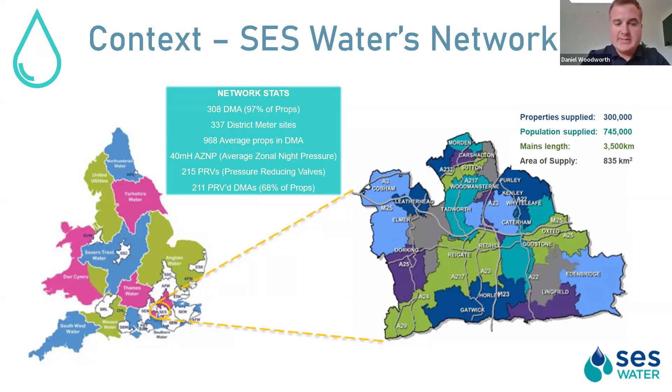So when we set out, as you do when you start any project, you think about what your principles are and what you're trying to achieve. And I had one very clear overarching objective, and that was to reduce leakage. So SES Water were funded in PR19 for a smart network as one of the levers that were being pulled to reduce leakage by 15%.

So that's all well and good. That's an overarching aim, but what did we break that down to? So there were a number of things. Firstly, we said we want to live this concept of a golden hour. So we want to be on top of things within the first hour. We want to know about them and we want to have actioned them. So when customers ask, what's going on? Why haven't I got any water? Why can I see water running down my street? We would know.

Secondly, we set out to create dynamic real-time alerts with high confidence levels. Had to be dynamic, had to be real-time. That was one of our key things that we said it needed to be. We wanted to involve our staff, and I've already mentioned this, but we wanted to put knowledge at their fingertips. There's nothing more frustrating being out on the ground if you don't have information, or even worse, if the customer has more information than you do. So that was one of the key things, to put knowledge at their fingertips.

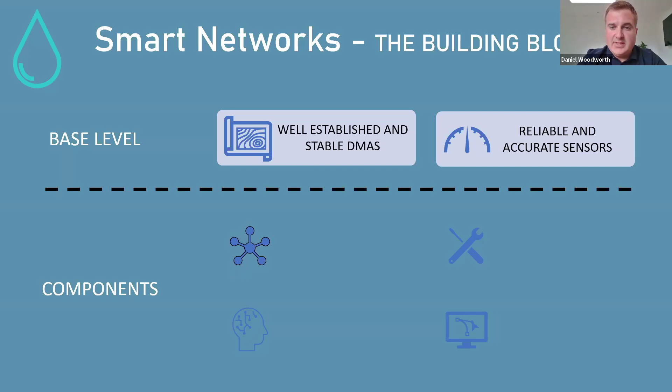So the first of those base levels is well-established and stable DMAs. A point I've already made, but absolutely crucial to setting a benchmark and a baseline to assess what the smart network has actually achieved. And secondly is reliable and accurate sensors. Now, in some of our early trials, we soon realized that where we thought we had good data, we didn't. We had data that was fit for nightline reporting, next day or overnight reporting of leakage, definitely not fit for near real-time reporting. So we had to address this. And before we did anything else, we swapped out all of our sensors for new NBIoT sensors in order to, quite frankly, be able to carry on with the project.

So once we've got the basics right and the baseline set, we can then move on to building the smart part. And the first part of that is the communications network. So the comms layer is the bit that gets the data back to your premises, to your systems, in order for you to do the analysis and make decisions on it. But it's not one size fits all. So at SES, we went for the NBIoT solution. As I said already, we had good coverage, and early tests showed us that, and that worked for us.

But reflecting now, there are a whole host of decisions that go through your mind as to what's available to me. Is this going to fit the whole of my network? Am I trying to do other things? Smart metering, for example. Do I need a different type of solution that can absorb different data types alongside my smart network data that's coming in?

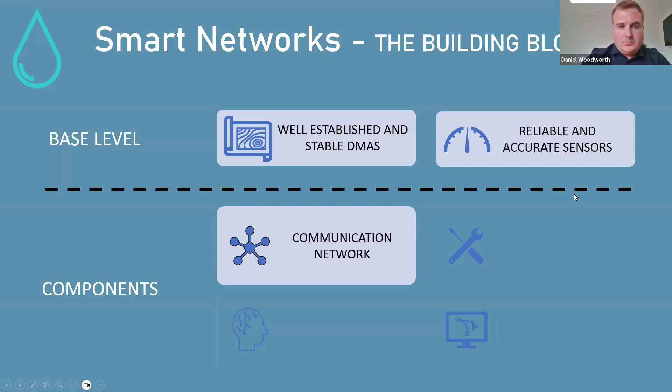So the next layer, which is enhanced data processing. So this is the smart bit, if you like. This is the AI or machine learning or whatever it is you're using to take your data and turn it into useful insights.

And at SES, we partnered for this. We decided to buy this in effectively. And we went for a cloud solution provided by Royal HaskoningDHV. At the time, it was called AquaSuite, and it's now called Twin.

But again, the one learning I would give here is to say, there's different routes you can take. You could try and develop something yourself in-house, and there are larger companies than SES Water who would probably have that capability. But I think what we learn is don't try and do something better than the experts.

The next layer is enhanced and real-time visualization. And this one's important because, again, you can have a really good system, really good software, really good algorithms, but unless it's presenting it in a way that your staff can use it, it will be more or less useless.

And so we were looking for a user interface as part of this project that our staff could engage with, interact with on a day-to-day basis as part of their business as usual activities. And there was a lot of work that went into developing this as we went through the project.

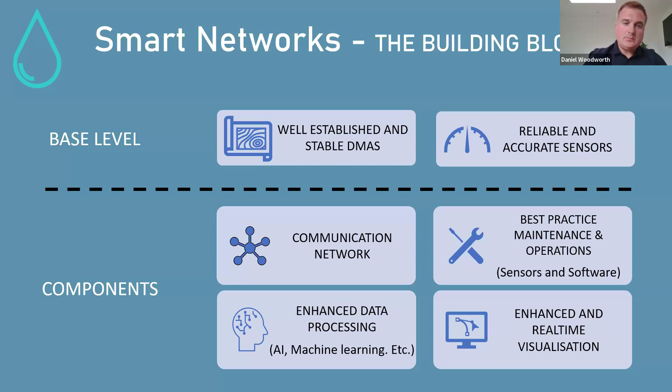Crucial as well is the expected battery life didn't change, and NB-IoT was the key enabler for that. These small packages of data that you can send via NB-IoT mean that you're not killing the batteries of your smart sensors. Obviously thinking about whole life cost and maintenance as well on those sensors. But this was a crucial step in getting that near real-time data that we knew that the software would need.

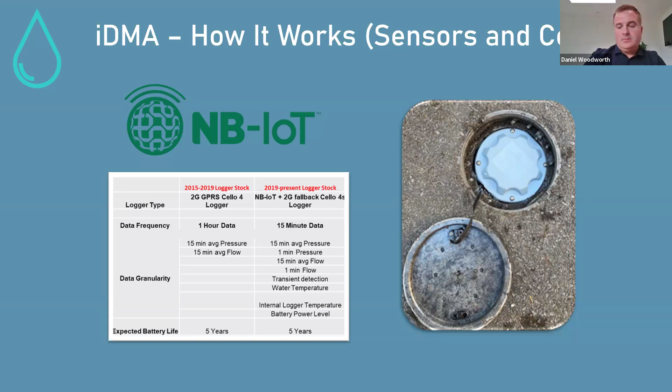We like the solution because it was calendar based. So it learns from previous Wednesdays or previous certain holiday days. It knows when it's school holidays. It knows when it's Christmas. So it will build up over time a really good knowledge of what data consumption should be. Obviously, it's very crucial that you have that historic data, back to my point about having that sort of longevity of stable DMAs as well.

And then it produces a limit line, and the limit line is what it then references against as to whether the area is in alarm or not. And the other clever thing about the software is that it has different filters. So these limit lines can change depending on the filter you're looking at. The idea here is that it gives you the ability to be alerted quickly to large events, large leaks, if you like, on certain filters, whereas on others it will say, actually, no, I need more confidence. I need longer to decide, but I will still alert on a smaller leak. And that just stops you getting too many false alarms.

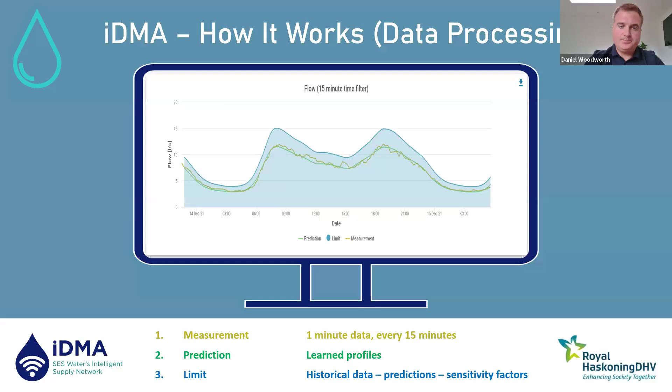So the controller would see that, and we built a whole suite of processes around this to help them use the software. Again, there's using the software and the user training that comes with it, but there's then using it in the context of SES Water. And so we built a whole suite of processes, responsibility matrix, etc., around the visualization.

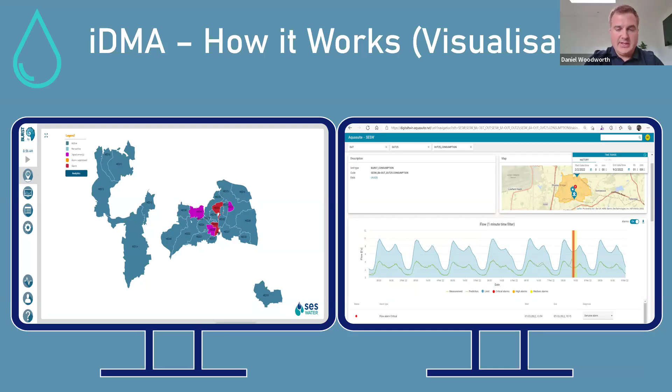Which brings me to the next point, and that's the people layer, which I deliberately left off of the layer stack, but it's so key. Bringing in this software, getting it all up and running as a project team, the handoff and the handover to the teams that are actually going to deliver this can't be rushed. And we did take a number of months in order to properly train our teams. We used it as a wider training opportunity as well. So at the time, we rolled out some hydraulics training as well as part of it to network inspectors and to the control room operators. And this helped them get a real understanding of how the network worked and why it was we were bringing in this solution in order to enhance that and make it better.

So I'm now going to give you some case studies. And these are examples to show you how the software and how the solution is working within SES Water. So, example one. Unashamedly, and I have got lots of stick for this in the past, but this is an example I've used many times in presentations. But I'm not going to deviate. I'm going to use it again because it really is a very, very good one, and it showcases what the software is all about. The fact that it happened on the first night is just a very nice sweetener as well, because it really was the wow moment for us, and the kind of high five moment the next day.

So what you're seeing there is the graph showing the trend that we just saw on the sort of idealized version, and you're seeing there a large deviation from the trend that's breached the limit line. And then the color blocks overlaid there are the alarms. So red alarms, or dark orange as it's displayed here, are critical alarms, and the processes that we built around that state that a critical alarm needs to be acted on immediately. So if you follow along the top there, you can see that just after midnight, a leak broke out at 10 litres a second. The software will tell you that.

The software then, as I mentioned about the filters, takes a little bit of time just to make sure. So it will measure a few more time steps. Now this was in the early days, so it did take an hour or so before it was confident enough to alarm. But at 2:45, it sent the alarm, the critical alarm.

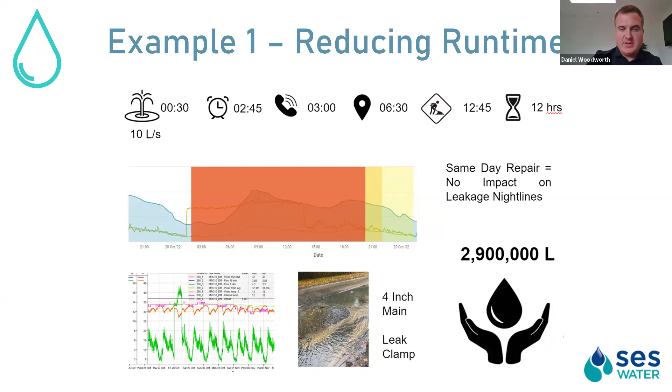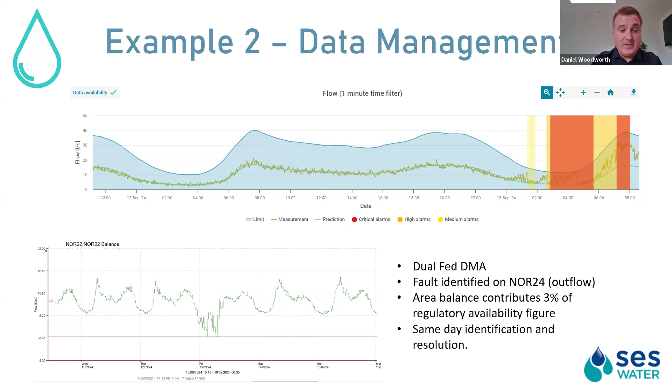So I'm now going to move on to talk about how the success was measured. And this has been done in a number of phases. We identified that we would need a very long testing phase. There are a number of reasons for this. Partly when we first introduced this, it was COVID times, and so a lot of the consumption patterns were more unpredictable than they would have normally been.

So we set out and said, okay, we are going to need an extended period to really test how this works. But secondly, we also knew that it had to go through a variety of different situations, seasons, events and things like that for us to really test whether it was hitting all the marks we wanted it to hit. So I'd say it was probably a full 18 months after go live before we said we've fully tested it now through every type of eventuality.

So as a whole, this is the performance that we found in the first 6 months after go live. The way we came up with this is we tracked every event that we had, and we compared it to a set of predefined assumptions around what would have happened before we introduced iDMA. These were predefined, so it removed the chance of anybody trying to rig the result. And overall, we saw that there was a 40% reduction in runtime on the larger bursts and leaks on the network. So from 3.9 days on average down to 2.3 days afterwards.

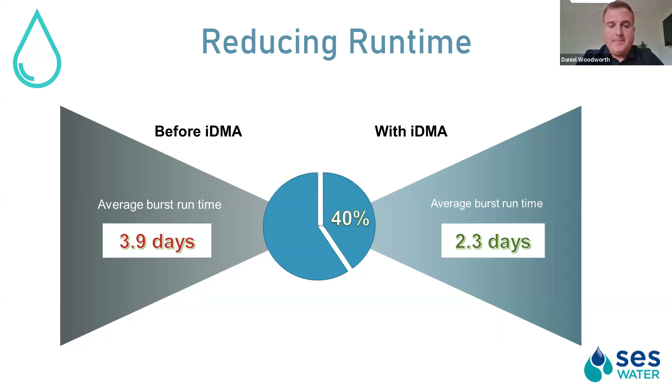So really good performance, and obviously we were very excited to see this. And it wasn't a coincidence that it corresponded with a reduction in leakage over the same period as well. Being honest, since then we've seen some fluctuations in that performance. It hasn't always been at 40%. It has reduced, it has gone a bit higher at times. But consistently, it has come back to that sort of number. So we know that is the potential benefit you get on reduced runtime if we're running on all cylinders.

So, as I said, we had to take it through its paces, through a number of events and situations. The first one of those was presented in the summer of 2022, when, if you remember, it was a particularly hot and dry summer in the UK. And it really gave us a first chance to see, could the system alert properly? Could it pick up the events that were happening? And would we be swamped, inundated with alarms that we just couldn't deal with?

I won't dwell on this too much, but no doubt people remember that summer there was a very prolonged dry period. As a result, soil moisture deficit went as high as it's been in recent memory, particularly in our region. And that caused a lot of ground shrinkage and caused a lot of larger burst mains to break out. So it's perhaps not unexpected that we saw an increase in alarms. Comparing the previous 50-day period and the summer outbreak period, there was an overall 40% increase in alarms, and that was very manageable.

And it was very helpful actually, because the feedback we got from the control room and the inspectors responding to these alarms is that it was just great to be able to triage these and compare one against another, and which one was most important to go to, because sometimes you'd have 3 or 4 of these in a single day, and these are large burst mains that you need to prioritize the response to and the repair.

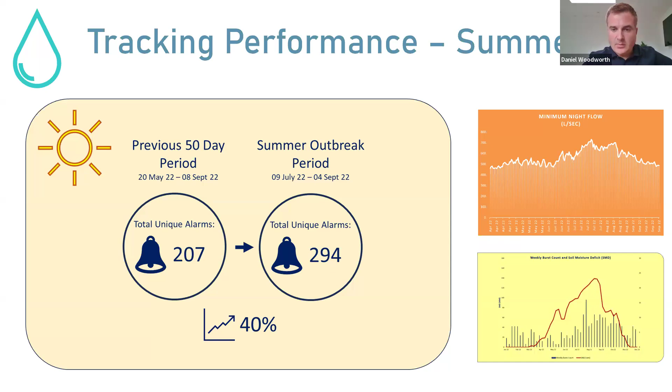And then we moved into a second event, and this was the big one. This was winter 22-23, which again, for those of you who remember, was a particularly testing winter for leakage in the UK. It really tested iDMA to the max, along with the control room and the poor people that operate in there. Were you swamped with alarms? Yes. There were a lot of alarms.

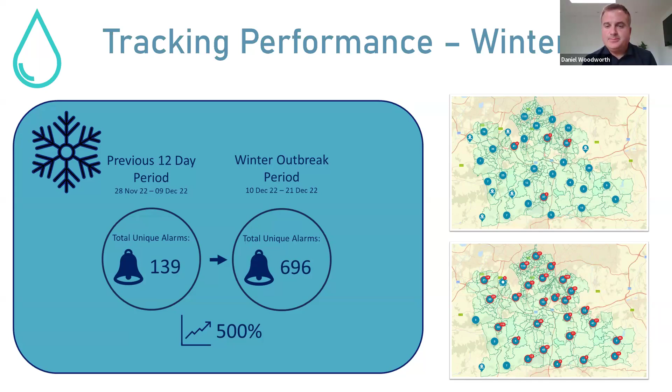Worth noting that AquaSuite, with post-analysis, didn't miss a single noteworthy alarm during that period. We did, because we didn't have enough people to look at them, but the system didn't. So we learned a lot about what we could have done and what we should have done process-wise during that period, thinking about perhaps doubling up resources in certain key areas. And one of the key things that came out of this is actually, as a situational awareness tool, more so than a leakage reduction tool, this is where it really came into its own.

We were able to prioritize during that period, making sure that we got to the leaks and the bursts that were causing the most damage to our network and to our customers. And as a result, SES Water didn't have a single supply interruption during that period that was related to the weather, whereas companies in the immediate vicinity to SES Water did. They had huge issues that winter period. And we think a huge part of that success was due to the way that we stuck with it despite lots of alarms, and we were able to prioritize which ones to go to and start working through systematically.

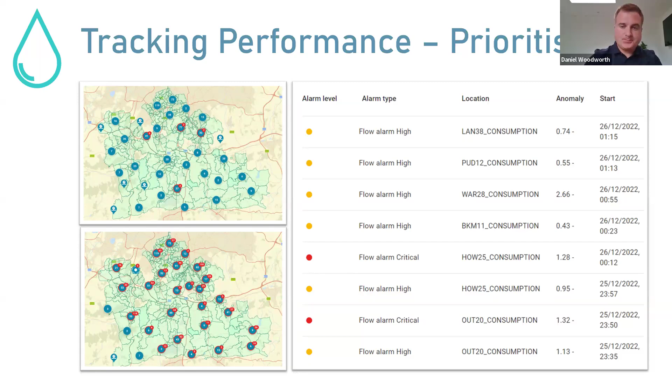So officially tested at the end of that, and actually, although it was a very challenging year, it was very important that we went through those periods in order to understand what the software was capable of and how we needed to adapt to using that software in certain circumstances. So we enter the business as usual phase, and this is the phase that obviously SES are still in now. And it's how do you measure the ongoing success of something like iDMA?

So I caught up with SES Water the other day and asked them, how's it going? How are you tracking it now? And I was really pleased to see that they've been working with Royal HaskoningDHV to develop dashboards and ways of tracking success. What was really exciting though for me is to see just how embedded it's become. I was working in SES Water's headquarters yesterday, and a chance meeting with one of the senior controllers, and I said, how's it going? Is it still working for you? And he said it's absolutely fantastic. It's fundamentally changed the way we work, and how we manage incidents and events on the network.

So what are they doing? Well, they've got this tracking system in operation. And so what that's doing is it's telling you things like sensor performance. It's highlighting where you might need some maintenance. What's your percentage of coverage and things like that. It enables them to complete post analytics on events. So you can see some of the things highlighted there.

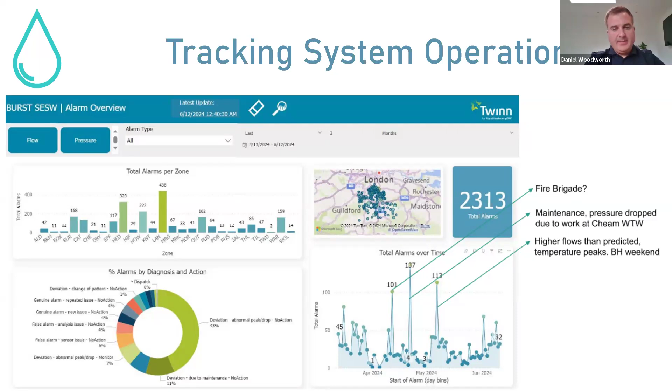And this can very much be used as a training tool as well for system users. So I asked them what else they've been doing, and again was really pleased to hear that they're continuing on with the leak location project. So I've just got a couple of examples here, screenshots. They've got Royal HaskoningDHV doing this analysis for them.

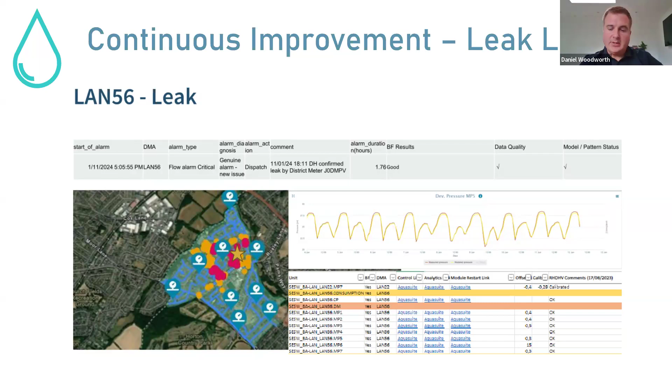And again, it's trying to really fine tune the ability to use the micro pressure variation in an area, the multiple sensors, in order to hone in on leak locations. And this is being done in a simulated way. So there have been some test leaks, some hydrant flushes and things, but also done as a post analysis on actual leaks on the network. And they're getting some really good results. And you can just see a couple of examples there.

This particular one's a bit harder to see, but down in the bottom left of your screen, you can see where the leak was and where this software was telling you the leak was. In best case on some of these trials, they're getting down to 2 or 3 streets. I think we have had one that's been on the same street. And worst case is it sort of quarters your DMA, which still has value.

So yeah, early days, but ongoing testing and very much part of SES Water's plans to continue to enhance this element of iDMA. There's further potential here as well in terms of bringing different sensor types in, whether that be acoustics, temperature, even some water quality sensors around chlorine residual and things like that, which could all be used to layer up and improve the predictions.

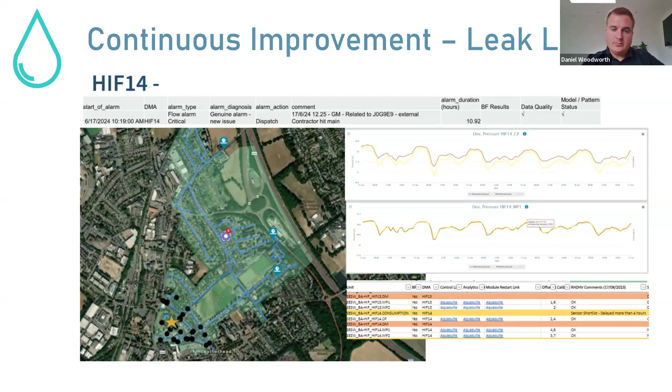So as I draw to a close now on the presentation and get ready to open up for questions, I thought I'd return to my something to think about. And hopefully you've all been able to ponder those questions as we went through. So I'm going to give you some of my thoughts on each of these. But remember, I've got the benefit of hindsight, having been through this program and been heavily involved with it, now stepping back and reflecting on it as well. So here's some of the things that I think.

So what does smart mean? Well, it's got to make the day job easier for the teams. If it doesn't do that, it's not very smart. Needs to be data-led. I think that's actually a basic of any smart system. Has to use data. Evidence-based, that goes hand in hand with the data. Works for and alongside the people.

So one of the concerns that was raised as we started rolling this out, that we were very quickly able to quash actually, was I don't need another piece of software. I don't need a system to tell me. I know how to do my job. But if you get a solution that actually helps make their lives easier, they very soon come around to the idea that they can work symbiotically with this.

And you know what? It doesn't have to be rocket science. It's great to have clever things and clever algorithms, but actually it just needs to do the basics very well and quicker than a human can do it. In terms of the value, this is an interesting one. Obviously, there's some obvious ones here, ODI upside, avoidance of ODI downside. These are key things that the exec will look out for in terms of regulatory performance.